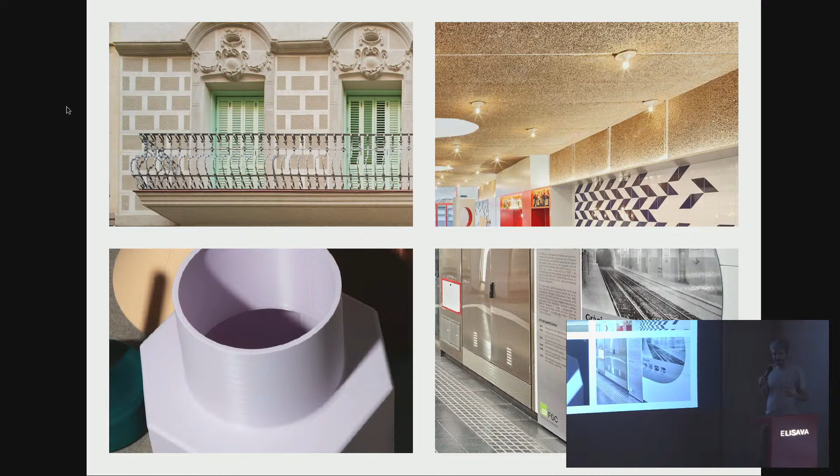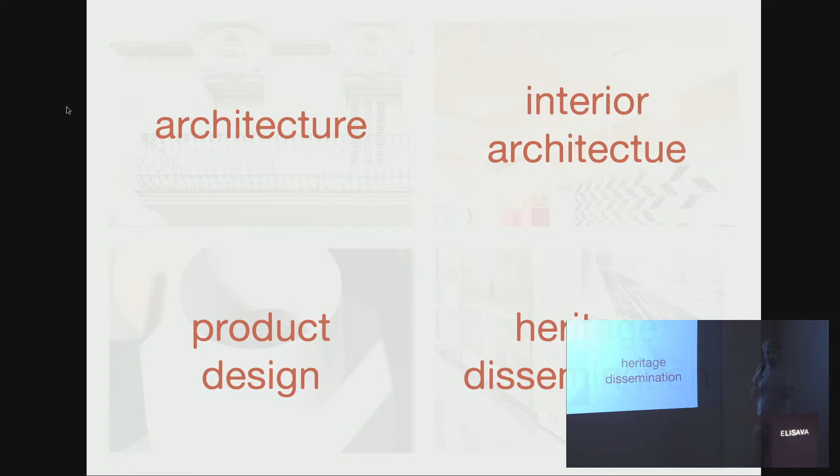I think it's relevant that this study of heritage dissemination gives us a cultural background that's very important, because things do not come from nothing. You have to be intense in your research, looking for references, trying to have architectural culture. Then when you design, you have it as a background, even if you don't know it, you have it. When you take the pencil and draw, you translate this knowledge into your designs, maybe to say no or yes to what you're thinking, but you have it in your brain, and then you can use it.

So basically what we're saying is that we encourage you to visit architecture, see loads of magazines, and keep on doing it for all your life, because it's like the most important part of knowledge, to live the interiors.

So here we begin. Daniela was explaining before about our experience here. We started as students, maybe younger than you are now, maybe 22 years old, in 2008. So maybe 15, 16 years ago.

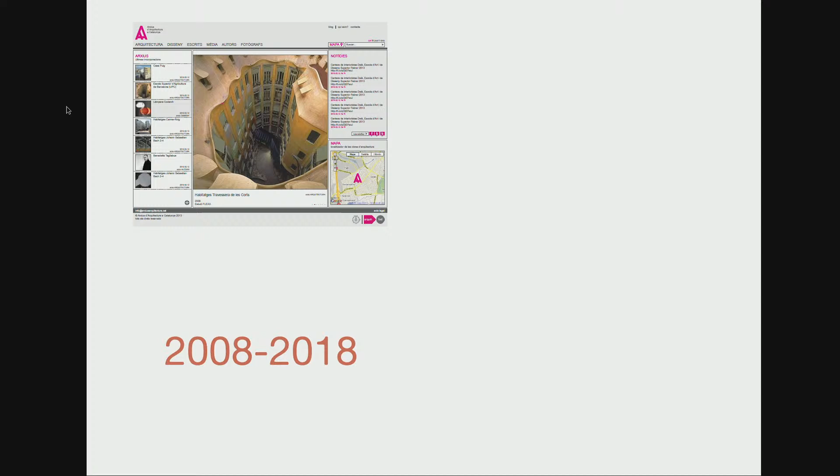We started because we were very curious about what was happening around us. Normally when we were students at the university in ETSAB, they used to show us architectures from around the world. But we thought there were many architectures here that were relevant, and we wanted to discover it by ourselves.

So we started to make a list, a list of typologies, a list of architecture in cities. At a point we had 500 references, and we said, well, we can start sharing it with people, so people can use our effort, for free, just for knowledge and sharing. In these 10 years we reached like 1,500 buildings.

We also have architecture, product design, writings, thinking, media, authors and photographers that are a very important piece in architectural dissemination. They also show us how to look at architecture, not just architects but also photographers of architecture. You may know that because nowadays you consume architecture through images and not mainly by visiting it.

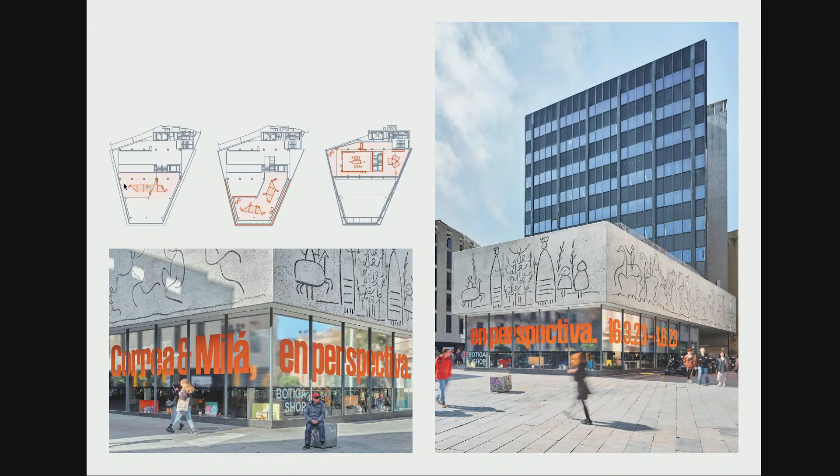How is it? Curated. The curation. We were there as curators and space designers. We had to invade, or we tried to invade, the three stories of the COAC, the main public spaces of the Architecture Association: the ground floor, the mezzanine, and the Sala Picasso, which is the first floor.

And we proposed this huge propaganda towards the city, using these particular colors and materials, which is the mirror and this intense orange, no? Intense orange, which were linked to their practice.

There were guys that were really elegant, but they also had this point of a little bit of tackiness, I don't know, if I may say it. So we proposed this use of double colors, and the display around the central part of the COAC was, well, dual.

It was in the mezzanine and the ground floor. We proposed these modules that could be combined randomly. They have three different shapes, so you can combine them and reach different forms.

This one here was lower because it was for exhibiting furniture pieces, so they are at the right height to view. Then on the mezzanine that Aurelie was talking about, they were higher because we wanted to exhibit plans and drawings, which were the main part of the exhibition.

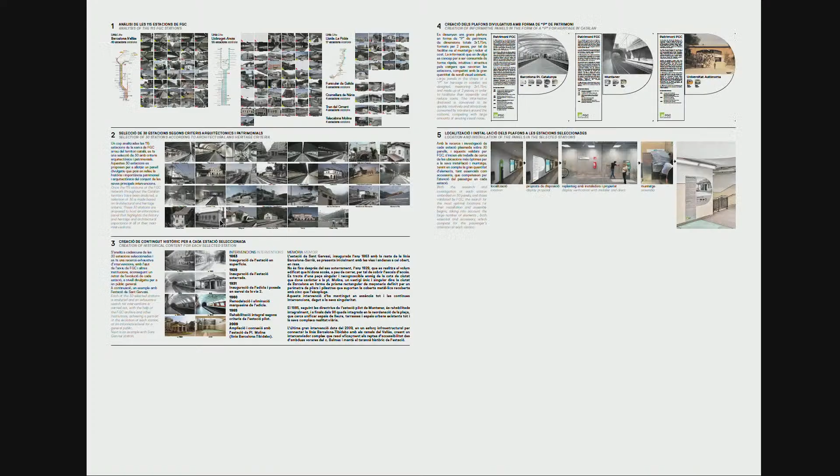That's the process we did. We proposed this piece that you can see in some stations all around the line. This is linked to architecture, as I said, not with this project specifically.

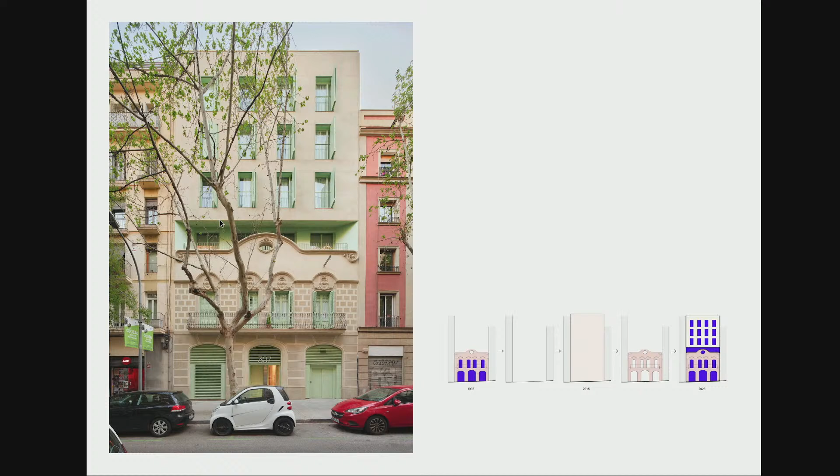This is a recent project we finished last year, for a private investor - a small building, a 12 apartment building. The funny thing about it is that the pre-existence was a 2-story building in the middle of the Eixample, and the promoter of course wanted to tear it apart and build a 5-6-story building, which is what we did as a project.

We reached this phase, but then luckily in some way the county council told us to maintain the existing facade, not the building, but the existing facade. So we had this challenge now that the new building had become like a remunta, an addition.

Well, apparently an addition, because the building is like a new building just maintaining a facade, but from the street it would look like an addition, and especially the complexity about this addition was the coronation of this existing building.

So our proposal, explained specifically in this facade picture, was to decide properly the colors and chromatism we had to use, and the links between the buildings, and the narrowness between the new extension and the existing coronation. This part was essential - it's important that you have the perception that it's not two separate buildings.

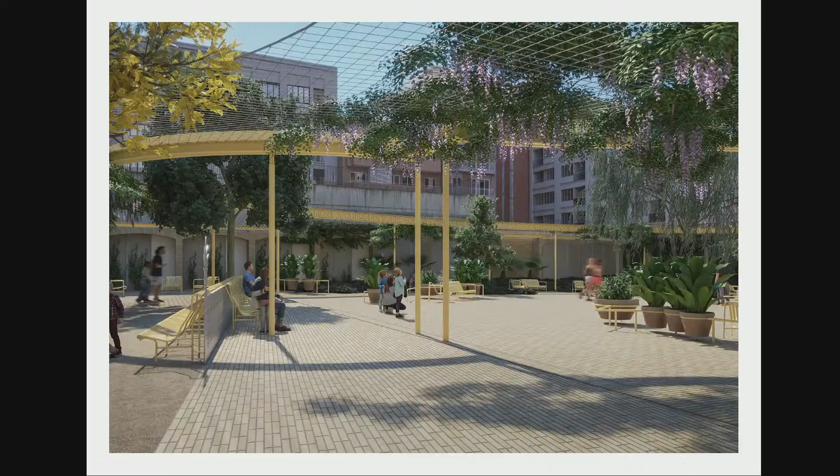So then we have the rear facade, with balconies, light, and a system of screens, trying to give some unity, very simple. We tried to be abstract, and this building opens to an interior courtyard of the Eixample. Then we jumped to a project we were committed to make.

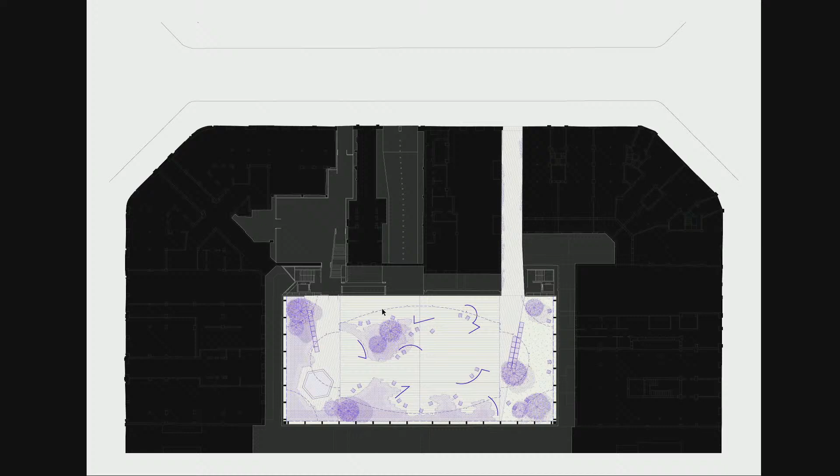Converting a parking garage into gardens, a supermarket, and 4 floors of parking. Nowadays the whole gray area and the white interior is a car park, and we were commissioned to do an underground car park for 4 stories, a 5th story of supermarket, and on the ground floor a public space for the city. This was our proposal.

At the end, we're still fighting to get it done. It's on Carrer Londres, near the Velodromo, the parking close to the Velodromo. The last city council wasn't really interested in the interior - well, they were, but they didn't want to fight with the owners of one of the buildings. Maybe the city council now is more interested in rescuing interior gardens.

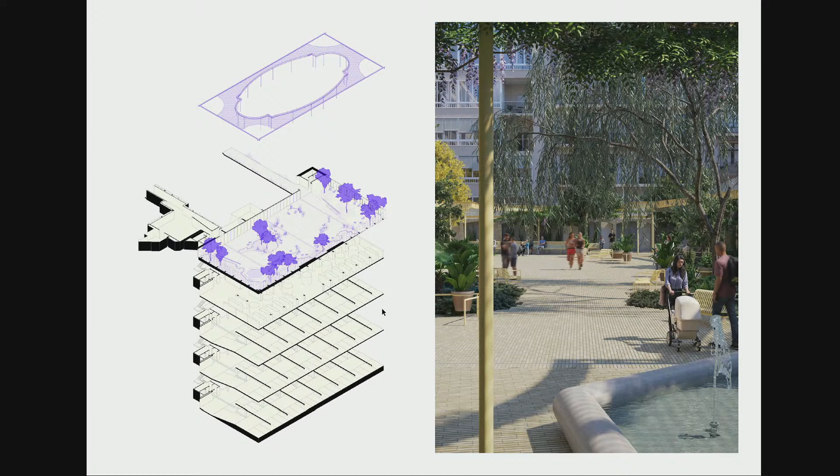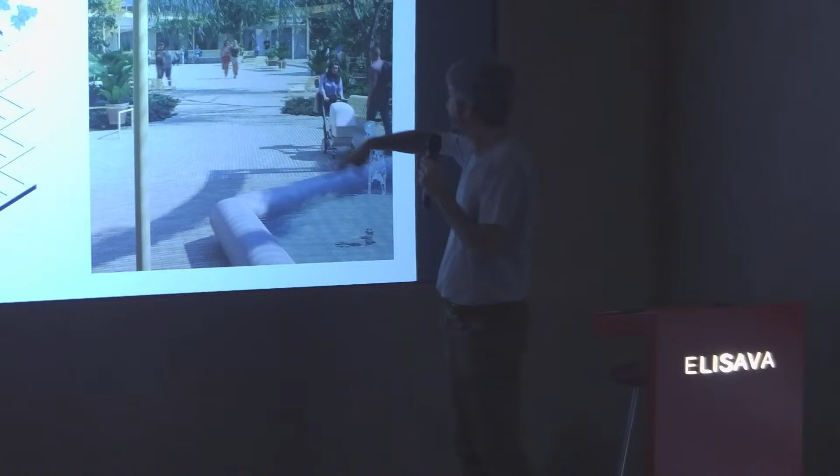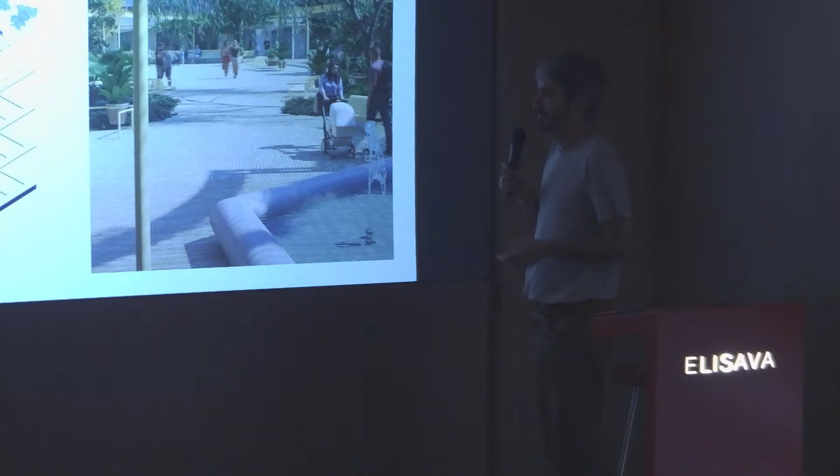But the strategy here was giving two shapes. The shape on the ground is like a more informal garden with forms, pots and chairs, like the gardens or little balconies you find in these interior Eixample buildings. We tried to put all the elements of a typical garden from the noucentista epoch, or what we thought a garden in Barcelona was - the parterres, the pots, the fountain - but in a very domestic way.

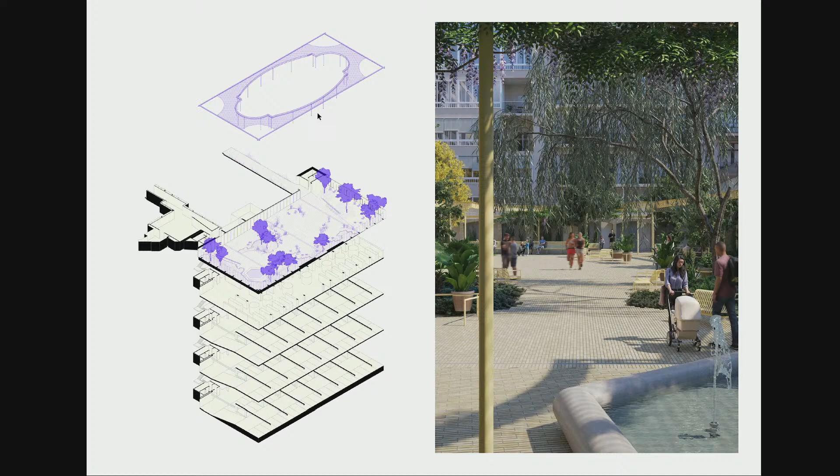With a little disorder that can remind you of a more domestic thing. Then on top we placed this pergola, which is the negative of a parterre - a noucentista parterre, a more classical garden - and it gives shade to the things happening below.

Next, we jump to the metro works related to heritage dissemination we showed before. These were some offices we did in Monistrol de Montserrat, near the cremallera, the train that goes from here to Montserrat, to the Abadia, the Abbey. Here it was just a concrete wall, and we had some space behind it, so the project tried to convert this nothing - it was just a concrete wall, nothing - into a facade.

So we decided to give this order down and up, so we can understand that it turned from a wall to a building that has a cover over. We didn't do the cover, it was already there. We wanted to make people think it was a project that was all together, so when you pass you can see the metro goes on top, and you have a building down. I think this is the most interesting thing of the project, trying to integrate what it was before.

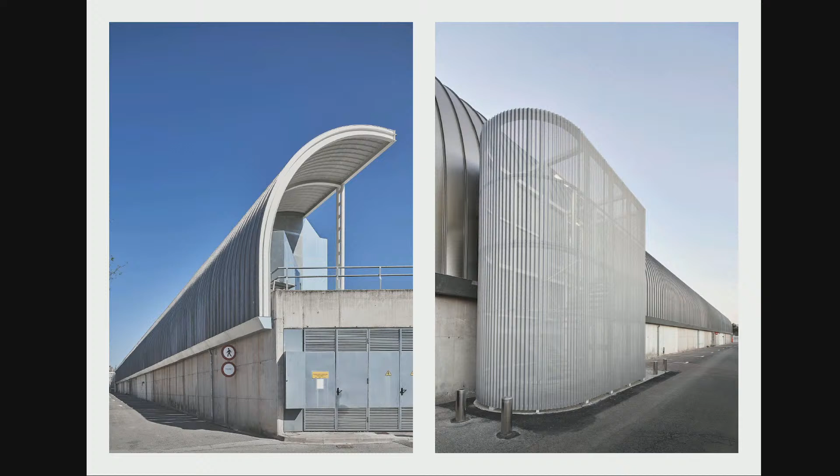This is another work for Ferrocarrils, in Rubí. We were supposed to close a 170 meter long railway in order to make a museum kind of space, somewhere to show the old trains. It also had to be a new facade for the center, which is one of the main centers for the metro area, for maintaining trains, warehouse of trains, operational needs, etc. We've been doing works in that space, so we're going to go fast.

Let's move on to these works. This is the museum we're talking about. The interior is of course an industrial building, and here's a video of the whole works.

Is it too heavy? Don't worry, it's not that important. I don't see it. Oh, sorry, thank you.

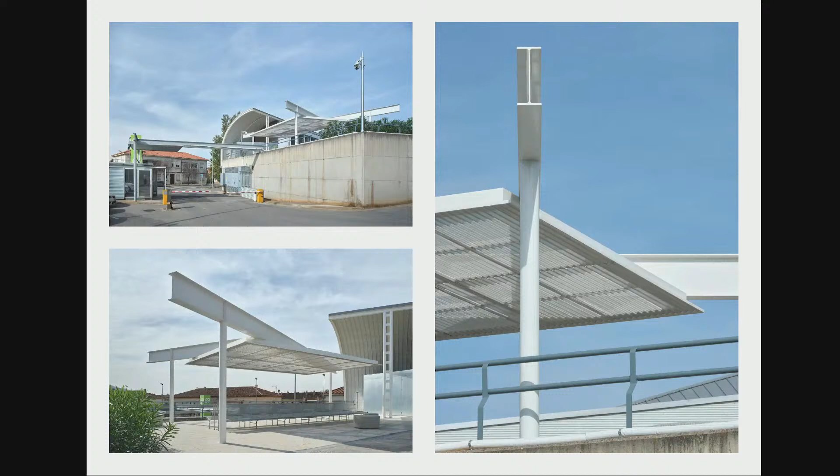Don't worry. After this first work, we also made this pergola. This is more domestic. There's a bit more movement to it, but its disposition is completely logical. It follows all the guidelines that the building was doing and the existing things we're working with.

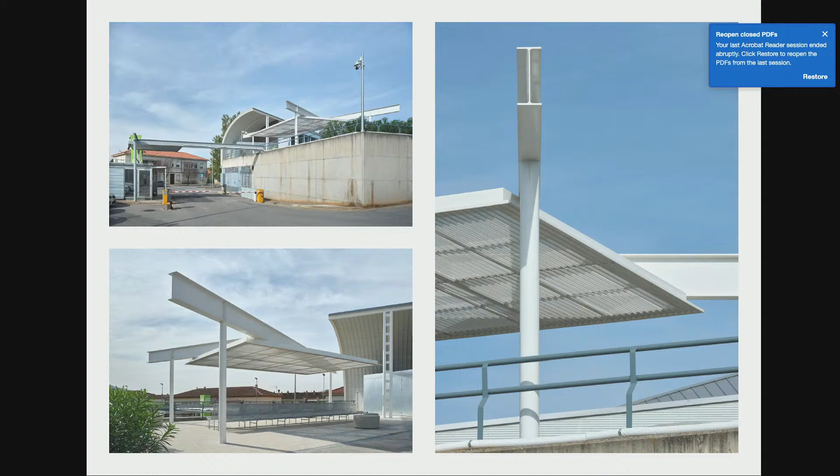You will see a lot of broken lines in our plans, in our work. You might think they can be frivolous or random, but lots of times they're drawn organically because they are needed. They're really rational, but the result looks random, like this pergola, the display between the structure, the superstructure, and the secondary structure of the slab that becomes the pergola. This desencaje works pretty intensely.

We'll jump to interior architecture, something I think in your course you're working on a bit more. Of course, we've also made interior architecture for Ferrocarrils. This was an interesting project because it was an old station in Sabadell, which because of the extension towards another line of the metro, it became obsolete. So they had to find a use for it, and they decided to use it as...

It's like an interior design exercise. You have to turn an old and abandoned station into a class, for teaching practical stuff to the workers - some space to make the testing of things. Working with the fire department, and they also rented it for films, for horror films.

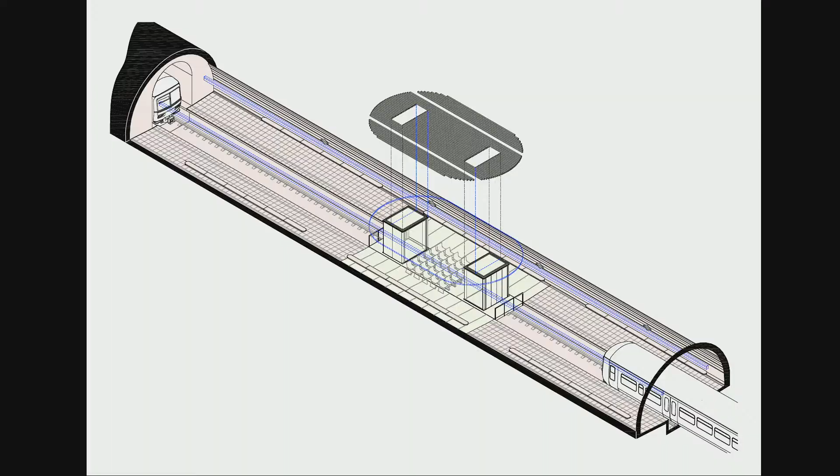So here it was the station. What we did is we put something in the middle of the station and turned it into a class, so you see these two volumes, and then we decided to make this cover. So you take class in the middle of the station. Now it is what it is - you can see it here. This exercise was particular, this funny thing about doing an interior in the middle of an existing, underground station.

It works and it's contemporary right now. We made it in 2016, I think we started in 2016. And since then until today we're still working there, and every year we're refurbishing a theater, or we will show some theaters. I think every slide will be one phase.

This is another one, El Villa, with the same problem. This was for a vermuteria. As you see, everything seems to be dancing, but there's an order here. Everything matches with a module where things change at a point. It may seem random, but it follows the order of the tile, which tells us the length of the bar. You can see it goes farther than the end of the wall, and we turned it into a shelf. What I try to explain is that you see a lot of movement, but it has a grid behind that helps us.

The use of materials in this bar was because the clients wanted a vermuteria from the sea, since their product was mainly salazones, dried and cured fish or seafood. The clients first wanted the typical wine barrels from the imagery of these vermouth places, but we wanted to change it a little. So we went to the essence of the materials and asked which materials link this imagery of the sea and boats. We rescued the cork, the blue and white of the typical tiles from Andalusia, and the shapes of the boats, like circles, with a very easy floor to clean. We also tried to bring the cork to another level, using it as part of the design, but also to absorb people talking and shouting, since drinking vermouth with friends is very noisy. This material helps reduce noise and also decorates the bar, because here it worked.

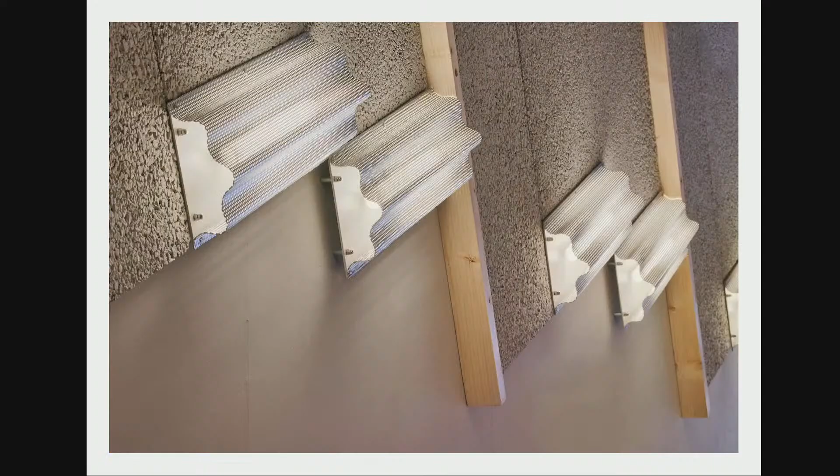We did another bar called Folks, a burger place made after El Villa, so you can see some things that remind you of the other bar, since they were close in time. What we tried to give here was, with microwave material, lamps that are really shown, playing more with color on the floor, keeping the cork but just painting it, because we didn't need that expression of the material here, just the function of absorbing noise.

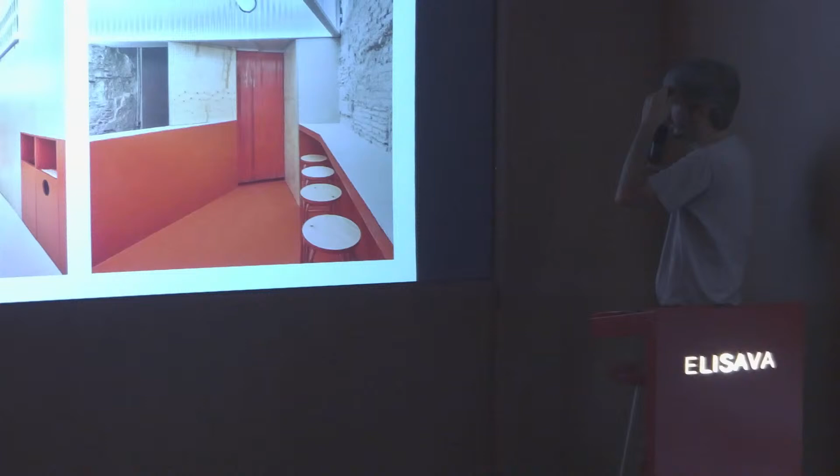In many bars you can see that we try to avoid showing the whole space from the beginning to the end. We try to get things from that space — maybe here it's the arc that was in the wall, which we turned to make a separate space behind. For us it's an advice: don't always give the whole of the space to the visitor, try to avoid showing something.

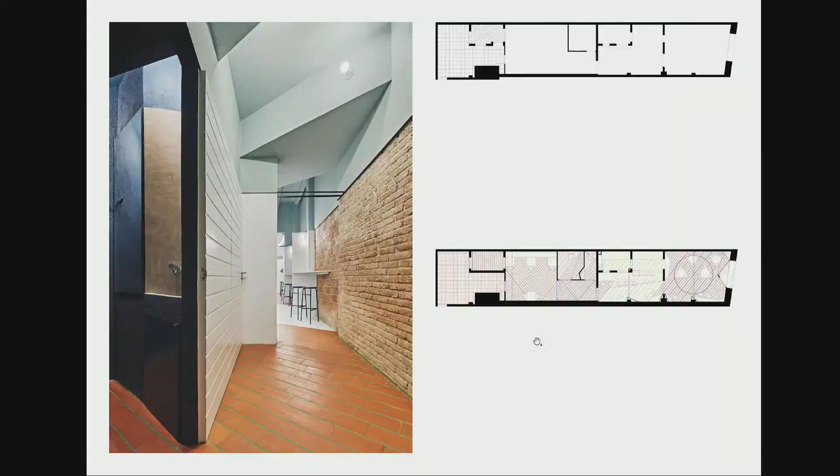In these three restaurants and bars you've seen, you might have appreciated that all the design was made bespoke, designed by us and made specifically for each bar. All the stools here too, and not only the shape of these tables that had to be joined or separate — that's why we made a circle. The guy wanted round tables but wanted to join them, so we had to make this, and all the stools too.

Also the lights in here — we wanted to use this material that we had used before in the industrial architecture you've seen before, but here it seems very delicate, almost postmodern, like a molding.

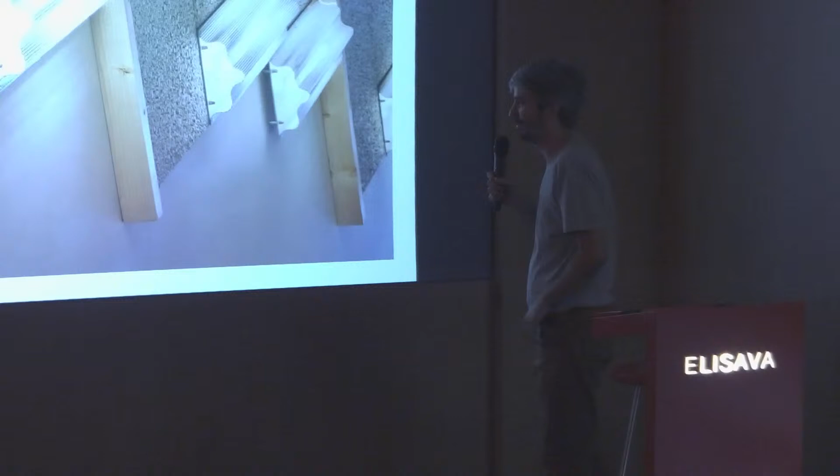We were lucky here that this bar was made by the owner himself, with his hands, which was pretty amazing. He even made the lamps, which were pretty accurate.

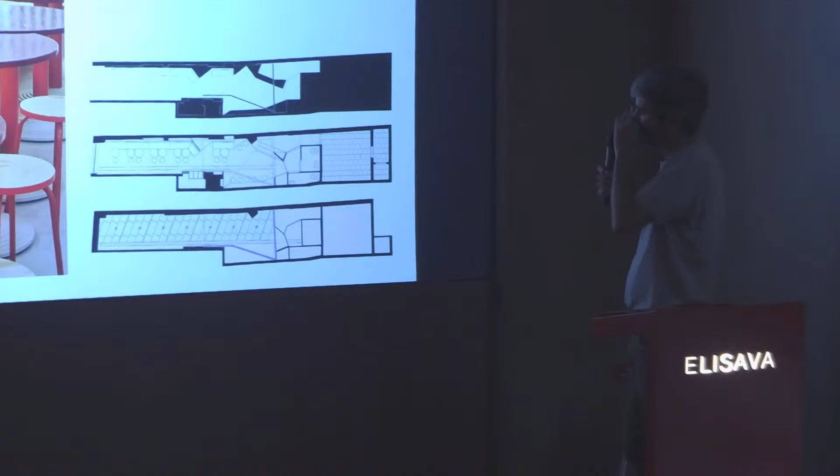Here are the details of these tables I was talking about. The plan of the bar approaches the same thing - it's a tubular bar, a space. You have to appropriate it, and through these river-like meandering shapes, you make the space, because at the beginning the space has no personality, it's just a tube.

And then, well, let's go to the shop part. That's for the same brand. We've made 3 shops. This was the first one we did, our first commission. But we put the images here in order to put the shops in context.

Then we made a second shop for them, pretty close by. And there, with this proposal, with this blue and white duality, it became their brand, and we started doing the other shops like this, with pieces of furniture independent from the container - because in the first shop you've seen, we went against the wall.

It was very, very small, so we tried to let the furniture be born from the wall and became shelves, cupboards, whatever. And in the other one, we had more space, so we decided, what if we work the other way - making a big piece here and then other pieces, trying to let the form of these pieces organize the space.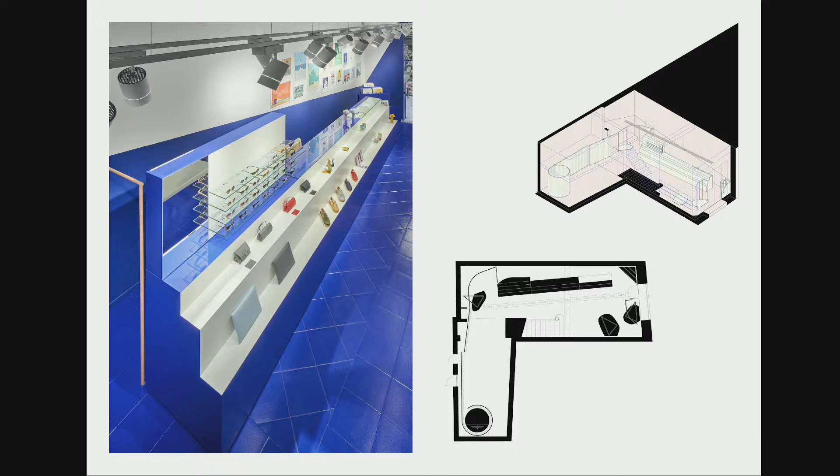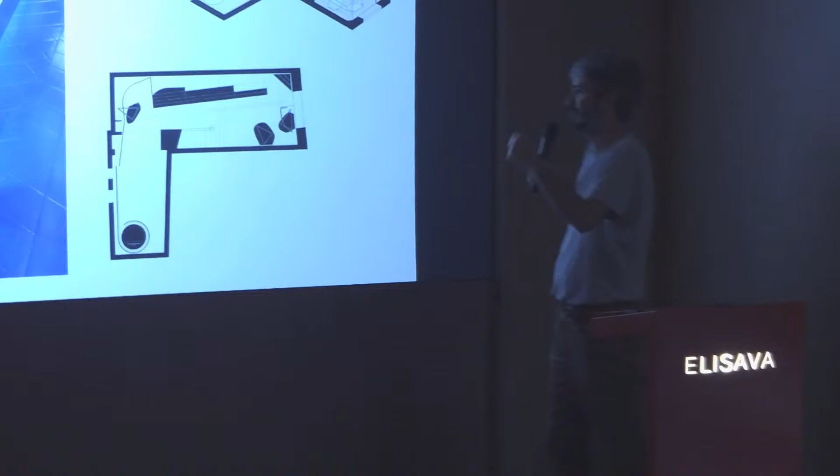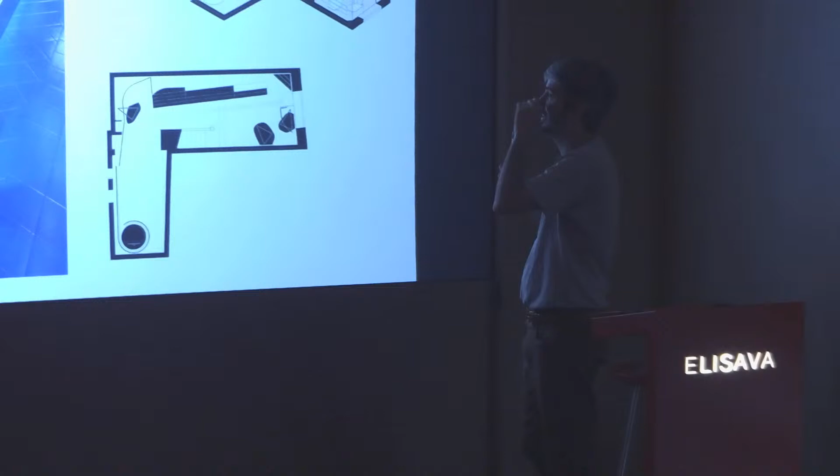As well, in the first one, since it's your first work, you're very naive - you try to decide everything, solving every corner. After years, we decided that if they wanted cheap shops, you can produce that in the workshop, so you don't need to ask the carpenter to come and bring a perfectly produced furniture to the millimeter. So with this strategy it's faster, and not so pricey, and it gives a great effect.

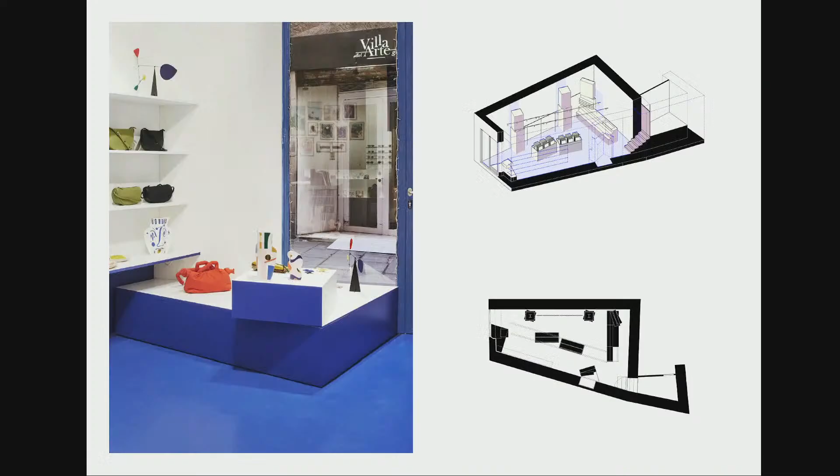Anyway, this is the last one we finished now. It's a small shop, with more or less the same strategy. We decided to follow the guidelines of the two party walls, which are not aligned. So we had this, and then we disaligned each piece at some height to give, well, not personality, but we needed that, because if you go with just one direction, you get too close to the pillar, and if you go the other direction, too close to the other part of the shop. So it helped us organize it.

And this is a shop that maintained the separate elements. They liked the prices more than in the first one - pretty simple, really, really inexpensive.

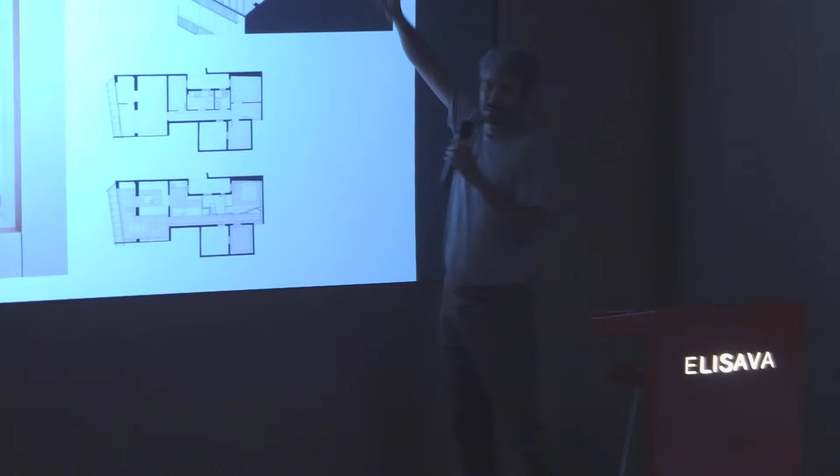So then what you have is a flat that you join from the corner, which is quite difficult because you have to distribute along a corridor. So how to turn this corridor into an interesting thing - as a strategy, how can you do that? We tried bringing light to the entrance, which is very far from the facade, through this patio, through strategies with windows, opening the bathrooms and everything to bring more light.

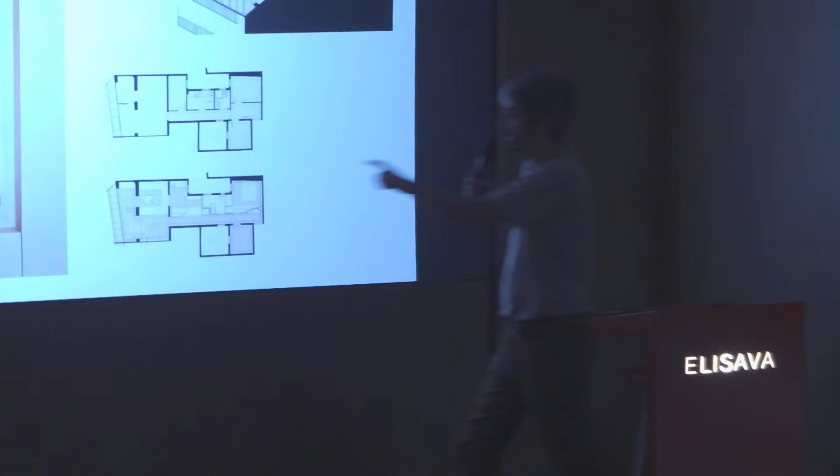And here you have a bit of the answer - I know it's not a very conventional solution, but here is the room. In the middle you have the bathroom, and on the other side the kitchen, and then the facade - that connection means from the room you can see directly the light from there. So all this game of visual connection, opening to light, and all that stuff helped a lot.

In these housing interiors, we tend to take advantage of a strategy that wasn't originally intended. These houses were normally designed for traditional family units, like two parents and two or three children, so they have a lot of compartmentation. New people approaching these flats have different kinds of family units. In this case, it was a single guy on his own, so you have a lot to play with whenever you can reduce or change things.

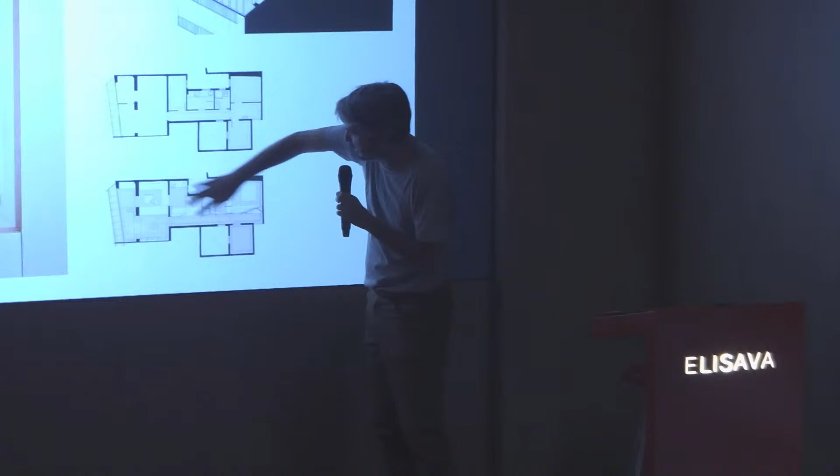As long as you can demolish this piece, you can change the kitchen, and the kitchen is part of everything. So this is all open. The corridor is just this space here, not all this long, which gives you what you see in the images. So this space is the kitchen, which was open towards the corridor.

Now it doesn't become a corridor anymore. It's linked as well towards the living room, and this green stripe that we decided to do became a strategical thing in the refurbishment. It breaks, as you can see here or here, when reaching the living room, because of the disalignment of the existing party walls. That's it, and this makes these broken lines here.

They seem random, but what was random was the original party walls. And the nice thing is that this green stripe crosses every room, the bathroom, the kitchen, and through its path it changes color, it changes materials. It's a really strong decision, but it worked, and the client more than accepted it and made it his own.

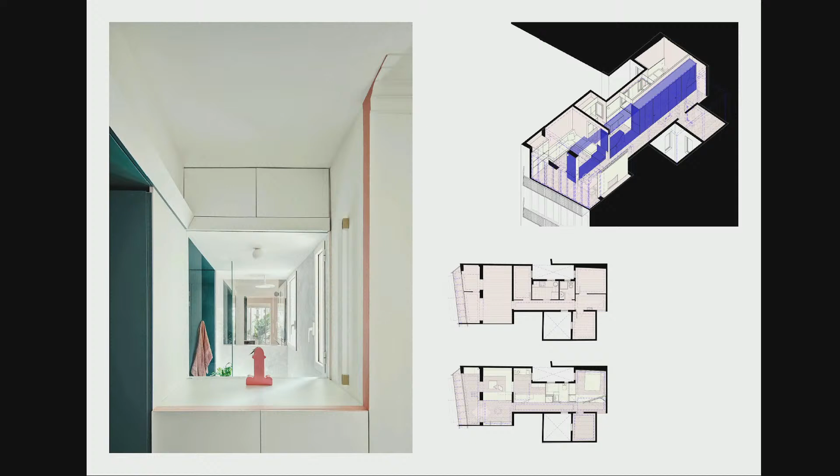Now you can see here the view from the bedroom at the end, towards the interior, the facade, the bathroom. Sorry, we're not fluent enough with English, but this is another case.

This is a square one, a very tiny one. Now it's 49 square meters, so nowadays maybe it's okay. If you look at the plan, we can start from here. We found that the structure was this structural wall, and then the installation patio. So what we decided is, okay, we demolish everything and we will grow around this patio.

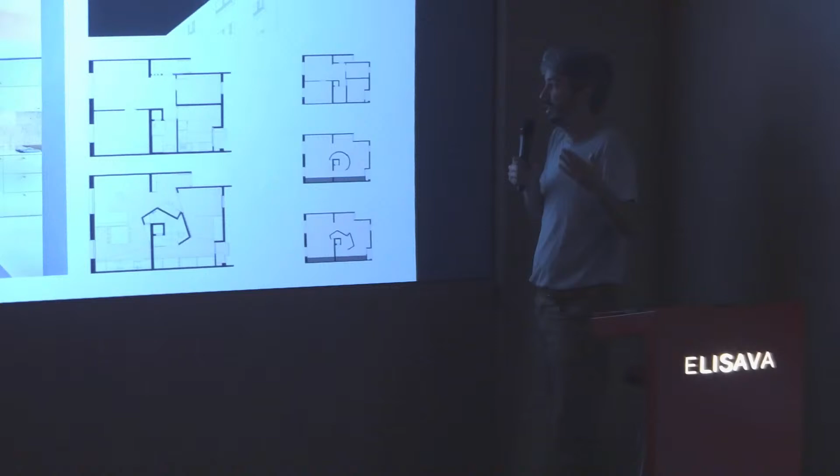First of all, we tried a decision that was a circular shape, more conceptual. Then we decided with the client that circular walls are not very useful for hanging things or putting shelves, etc., unless you make it bespoke. He also gave us the need of having a working space - it was after the pandemic, so we had to introduce that here, taking profit of the entrance hall to give him this space.

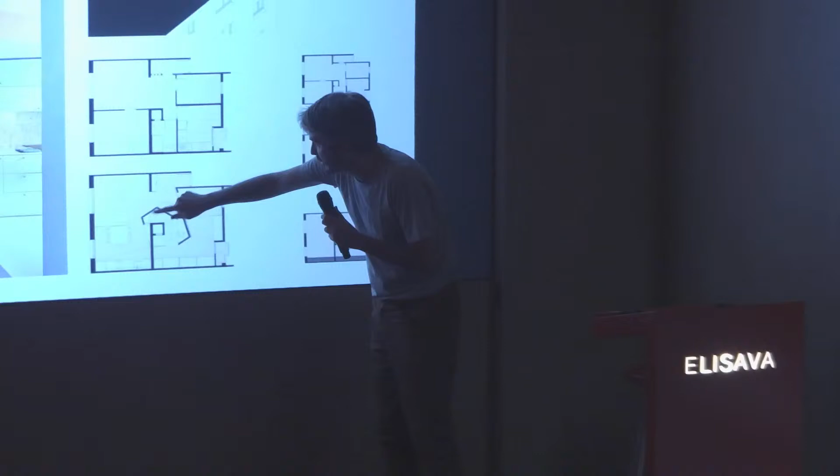So we started to distort this first shape, and it ended being this one now. But you can see that all around this patio you have everything - you have the bedroom with the dressing room, here you have the bathroom, the bathroom with the shower. The shower, since you don't have natural light here, has a window to bring natural light in.

And it's also a kind of erotic thing, because maybe you are having a shower while your partner is cooking here, but then you have la boira - how do you say it - the mist, el vaho, yeah, with fog from the shower. With the fog from the shower, due to the temperature difference, it's not transparent - it's just suggesting someone is behind, that kind of thing.

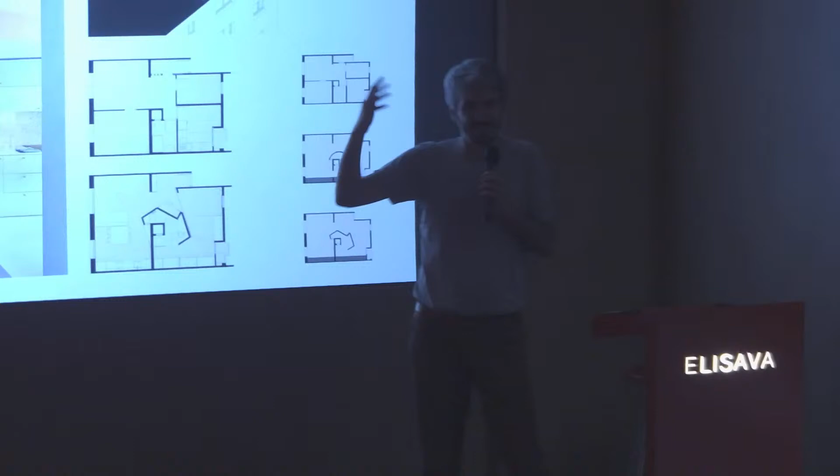So here you have the drawing of the axonometric, and here you have a conventional distribution. So this volume gives all this movement all around with the sliding door, reflections, materials, etc. We decided - normally you put the strong color on the floor, it can be wood or whatever, and then the house is white. So here, as it's in an interior Eixample building with the facade facing east...

So here we tried it, and the client was happy about it because he really liked color. That's why he approached us, and it worked. And we put this kind of linoleum-like floor, which works pretty good.

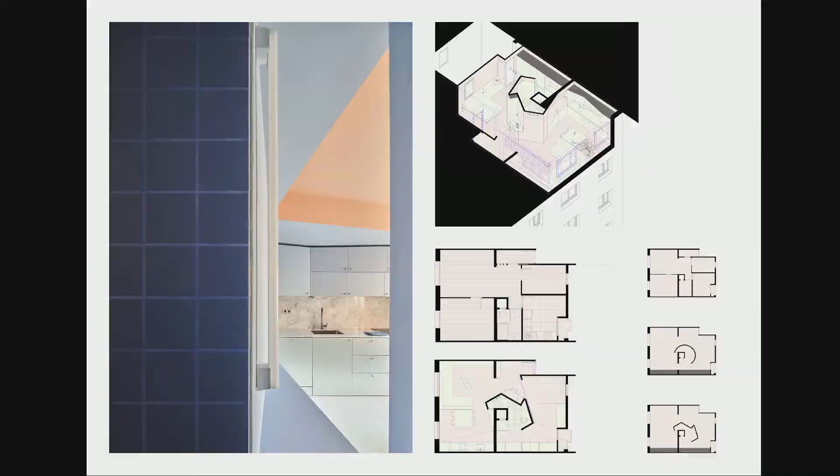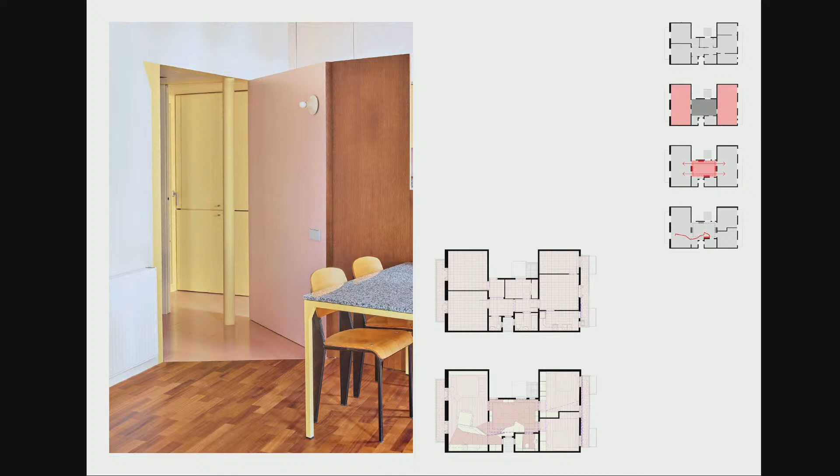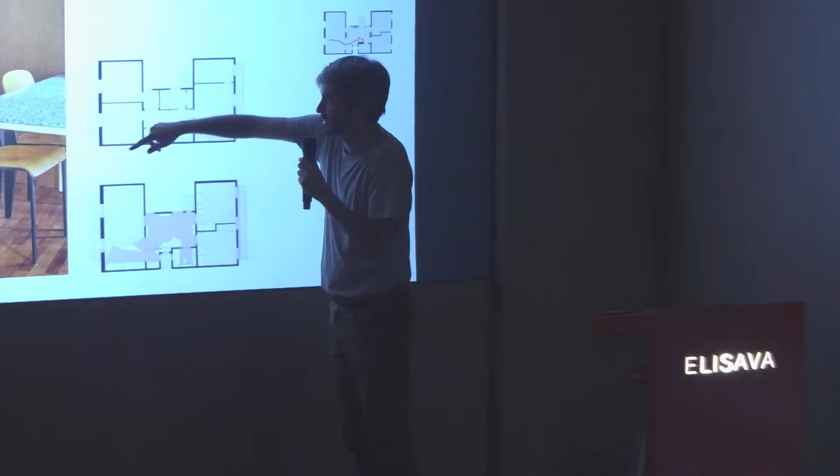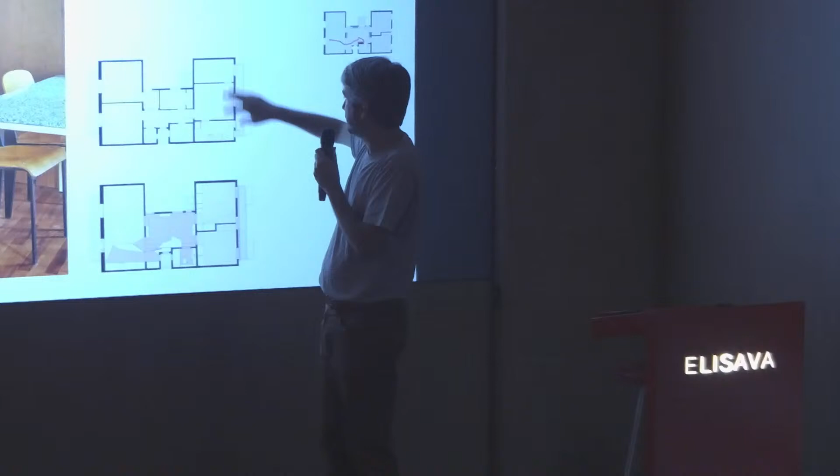And here is the last one that we can start also with the plans to explain. When we made the drawing of this flat, we noticed that it was very rational, because we had this part with the facade, the party wall, and the facade. So if you demolish the walls, that is what you will see in this drawing, you can find a very rational construction system from the architect who thought this building. First, they had towards the street the pieces of the rooms, and towards the interior patio the pieces of the living and the kitchen and all that stuff. So they wanted to switch, and it was very easy because the dimensions were practically the same. So that's the first thing we did.

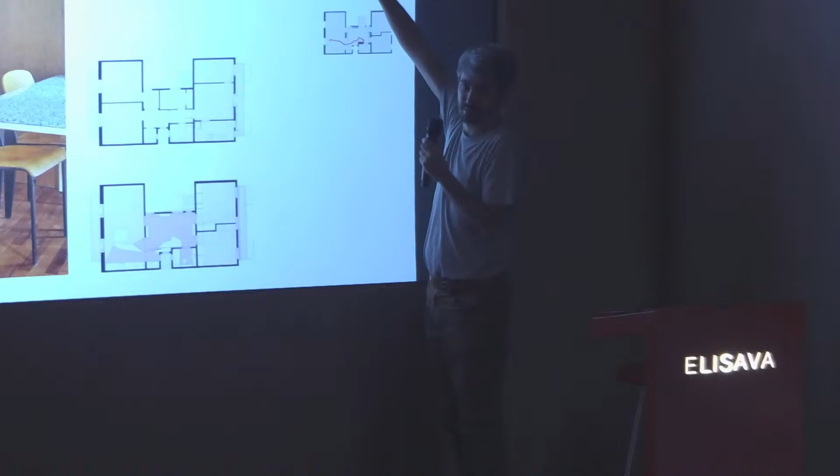Then once we had that, we decided to open, with some structural intervention, this door here, have this connection on both sides, and create a central space that serves the other spaces. It was a pretty complex space because it had 11 openings in between doors and windows. You have the lift here, the entrance door, a window, 2 doors, the bathroom, 2 more windows. So it was about how we give a unitary interior facade to this space, in order to convert this into the space when you go out of the room, the studio, integrating this to every area.

And then when we had this conceptual hierarchy between the use-based spaces and this central space, we introduced this last drawing. We introduced a movement towards the spaces in order to identify the kitchen and to create the studio.

Because we wanted to mix the spaces, so this is not just the kitchen and just this space. You can see it here. So when you join the space, this is a door. You can see a little bit of the kitchen. You can see this space. You can see the living room, and we try to give order through this cornice, to give a height to the space.

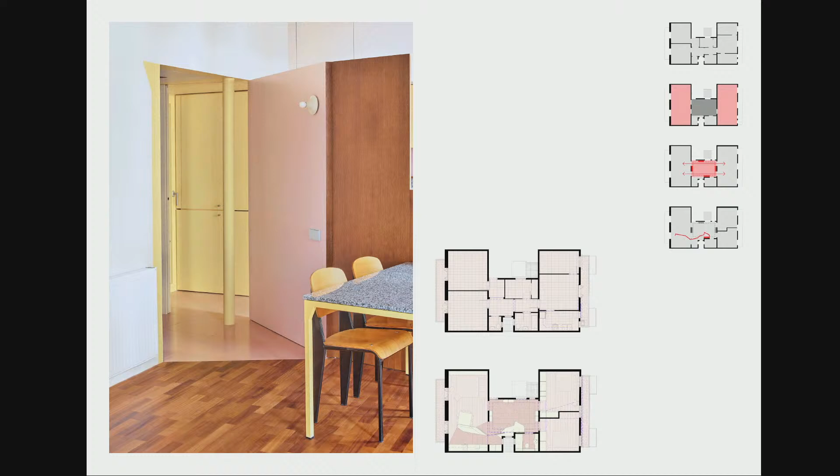Then these vertical lines that sometimes are shelves, are cupboards, are just supports, give order to a space that later we will break and also bring happiness with the colors, with these tiles that had the granite chips that later we will use in the desks or in the tables. So you can see we change materials. Then when we arrived to the living, we changed to more classic materials that the client wanted, but maybe in a quite different way.

And here are the Posmos that are trying to get postmodern buildings from the 70s or the 80s. People always said postmodern architecture is very formal and it's like an object itself. So our decision was to bring this object itself to the most prototypical object.

¿Cómo se dice un florero? A vase. Yeah, a vase. Yes, you go from object to building, and then we were going back from building to object.

And these are all, well, Teatrino by Aldo Rossi. These pillars are from James Stirling's, the Philip Johnson AT&T, Torre Velasca, well, many. And we do all this with PLA, with 3D printing.

And that's where I think we started using 3D printing, and since then it's something that has interested us a lot towards designing, and as well we've brought a last design that we're doing, which is a lamp.